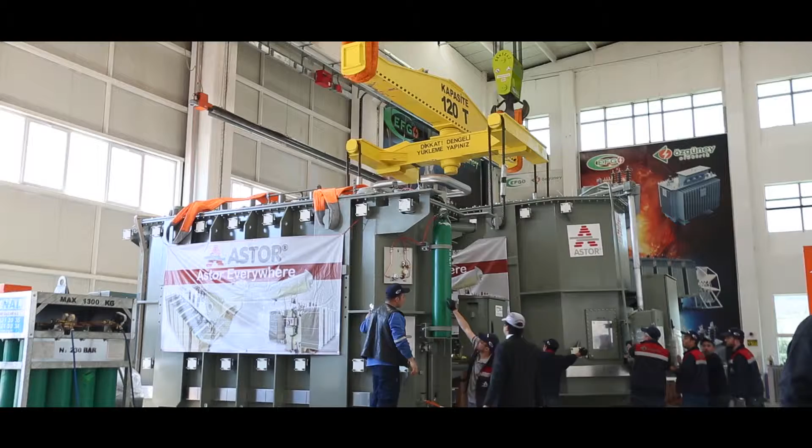The company manufactures cast resin dry-type and oil-type distribution transformers, as well as power transformers up to 220 kilovolts, 150 megavolt ampere at its factory. This facility boasts a closed area of 26,000 square meters, established on a 36,000 square meter surface at the Ankara-Sincan First Organized Industrial Zone. Our customer satisfaction-oriented company takes quality as our primary target for both manufacturing and service.

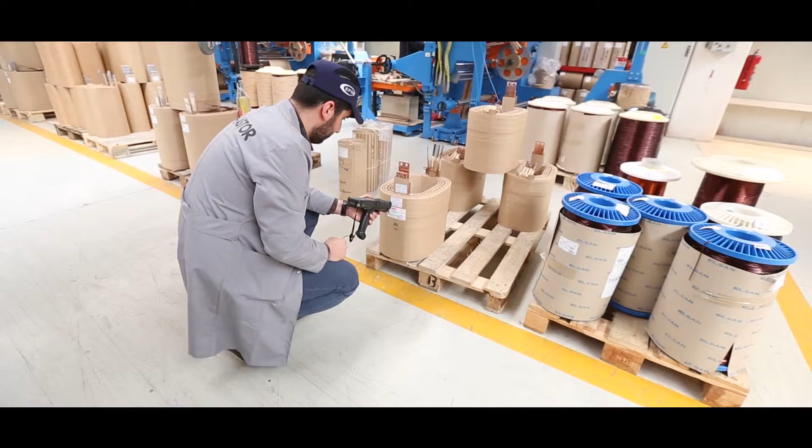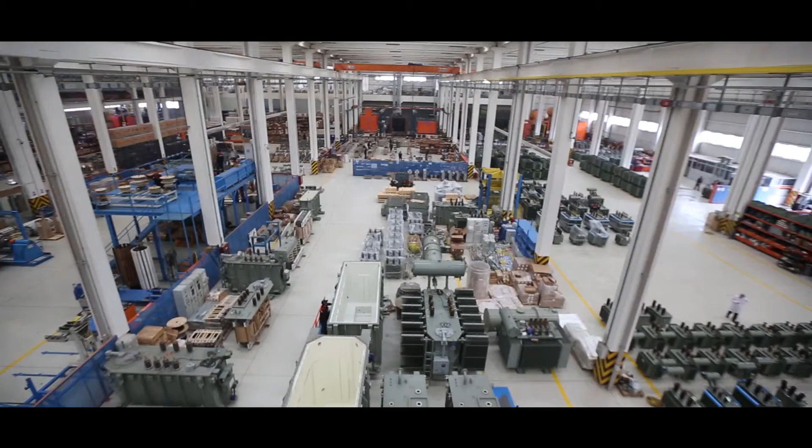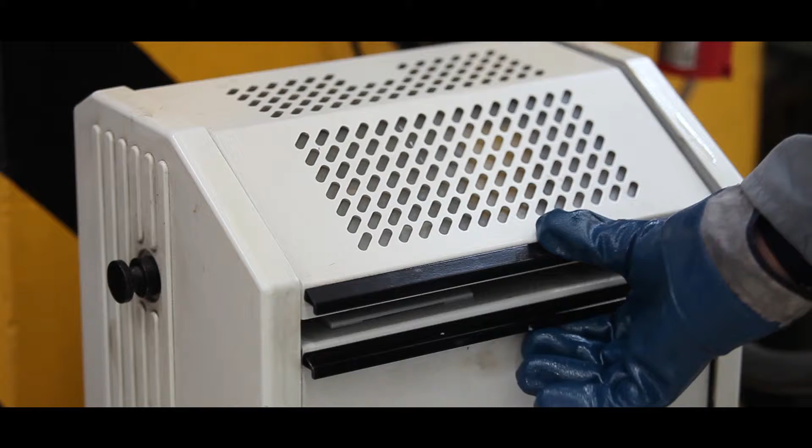All of the processes of manufacturing in accordance with the aforementioned target are meticulously checked at every turn by our experienced and competent quality control staff. Our company is in possession of many management systems such as TS EN ISO 9001, TS EN ISO 14001, TS EN ISO 17025, and OHSAS 18001. The completion of manufacturing is ensured in accordance with the related project and the quality management systems.

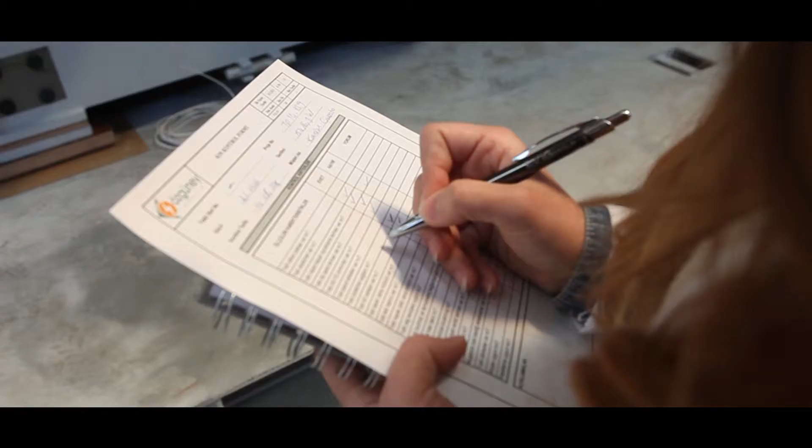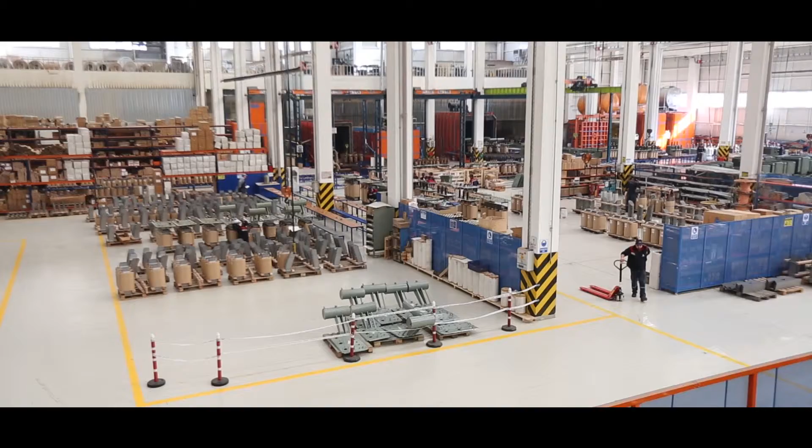Related non-conformities are eliminated with the implementation of corrective and preventative actions. All processes are recorded and tracked. Kaizen studies are conducted for the processes that require one by analyzing its accumulated data. Astor A.Ş., with a monthly production capacity of 2,000 distribution transformers, boasts Turkey's largest capacity and ranks within the top 5 companies of the world in its field.

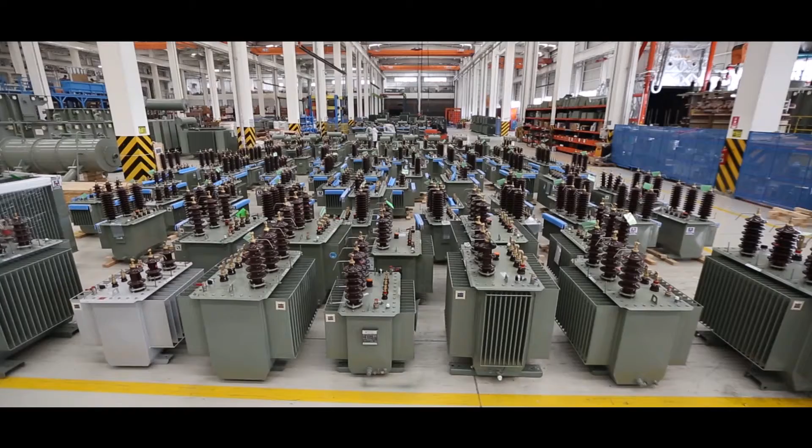At our facilities, we manufacture cost-efficient, safe, low-loss, long-lasting oil-type transformers with a power range of 250 to 2,500 kilovolt ampere and up to 36 kilovolt voltage levels, as well as custom-type transformers per customer demand, bearing the brand of Astor and EFG. Power transformers up to 220 kilovolts and 150 megavolt ampere, bearing the brand of Astor.

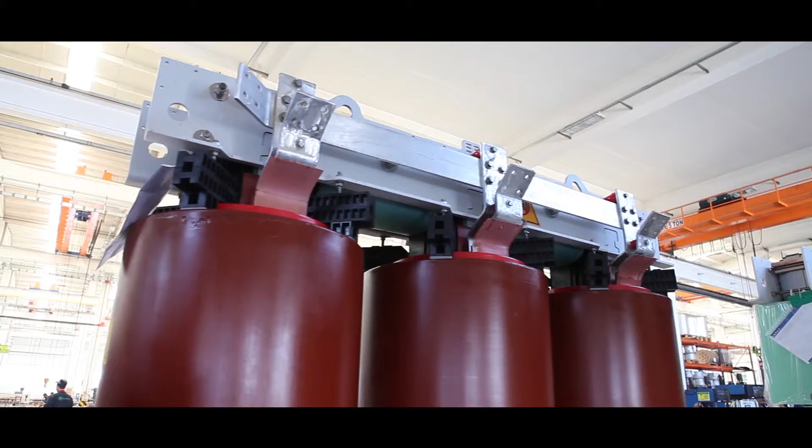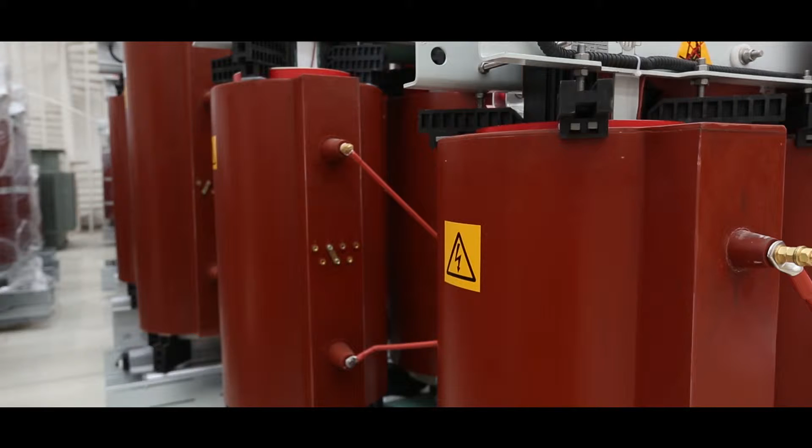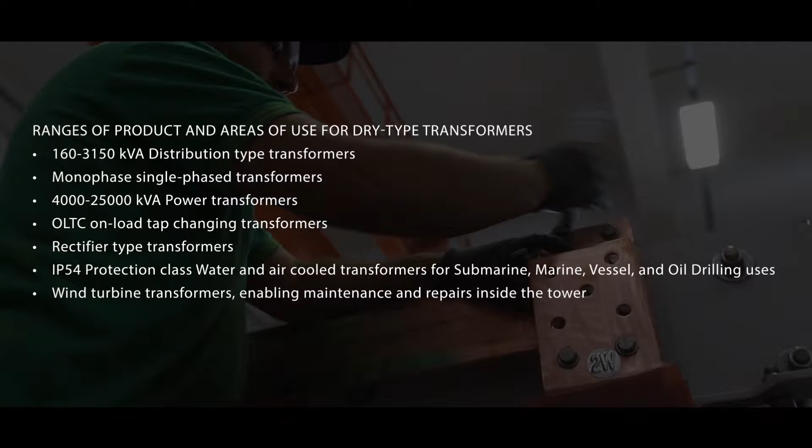Cast resin dry-type distribution transformers at the quality standard of ISO 9001 with a power range of 250 to 3,150 kilovolt ampere, up to 36 kilovolt voltage levels with natural air-cooled or fan-cooled options, bearing the brand of EFG. Ranges of product and areas of use for dry-type transformers are given below: 160 to 3,150 kilovolt ampere distribution-type transformers, monophase transformers, 4,000 to 25,000 kilovolt ampere power transformers, OLTC on-load tap-changing transformers, rectifier-type transformers, IP54 protection class,

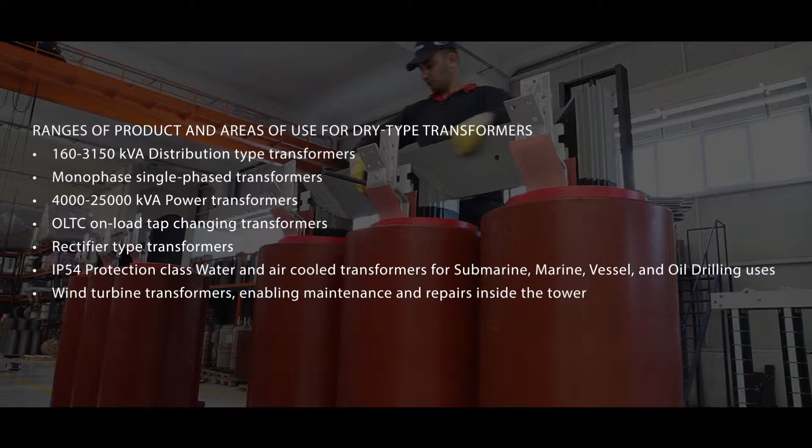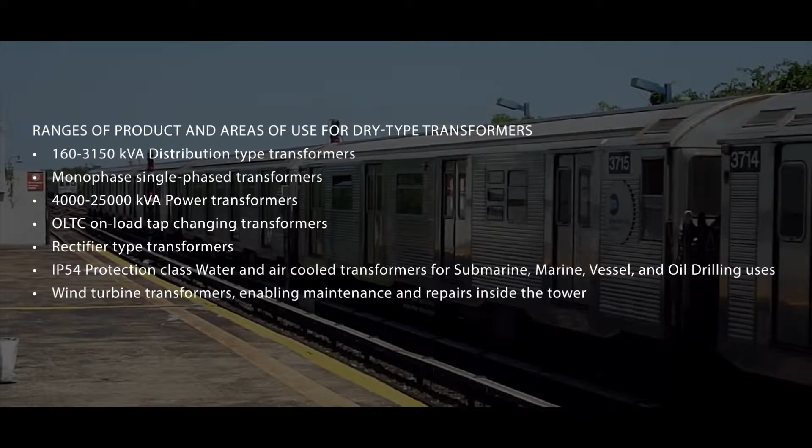water and air-cooled transformers for submarines, marine vessels and oil drilling uses, wind turbine transformers enabling maintenance and repair inside the tower. Minimizes the risk of burning and explosion at locations with a high density of human habitation, such as subways, tunnels, mines, airports, shopping malls, schools, hospitals and skyscrapers. May be manufactured with an internal or external type cell as optional in conformity with IP20, IP23, IP33 protection classes.

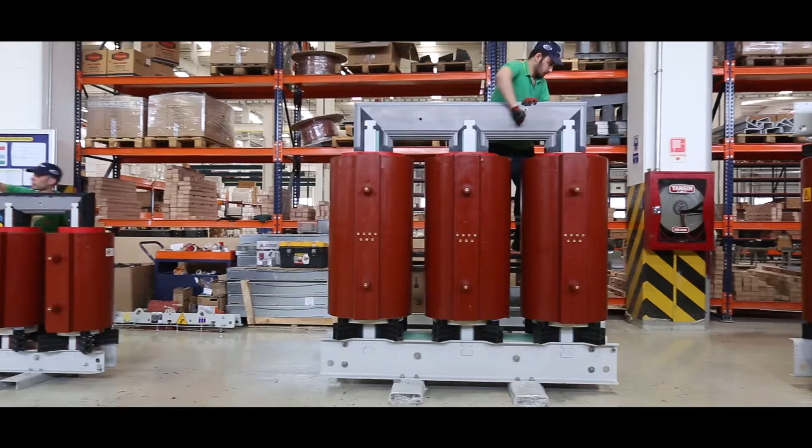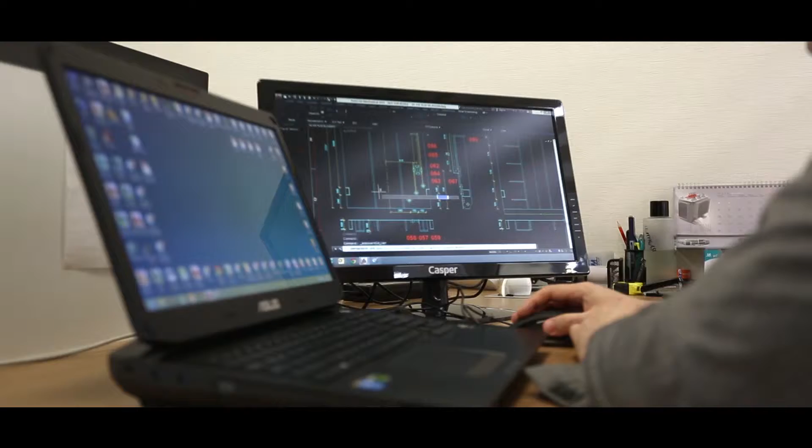Apart from the aforementioned, our overseas type test reports for the product series within the product range are constantly updated and have been certified by the international accreditation testing organizations such as KEMA, IPH and CESI. The materials obtained in their raw form are converted to semi-finished product inside our facilities and are then turned into transformers by the skilled hands of our experts. The projects are prepared by our experienced design team under the leadership of over 30 engineers.

We, as Astor Transformateur, are aware of the importance of R&D phases for our company and country. Therefore, a determined and firm step has been taken by our company to work with highly skilled personnel in order to own an up-to-date and comprehensive R&D center as of 2011.

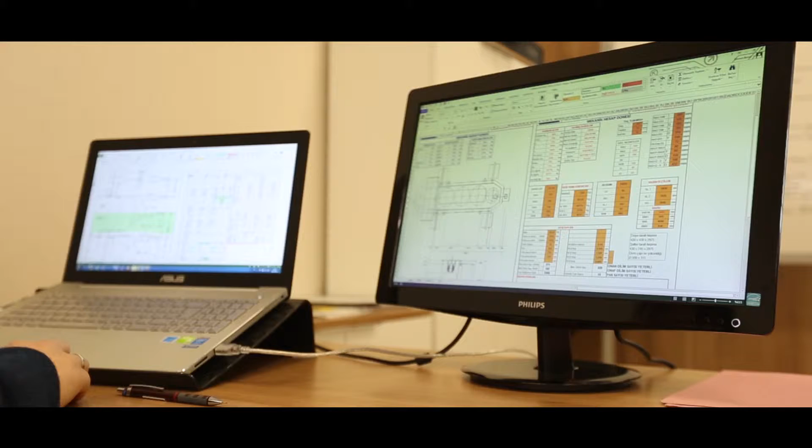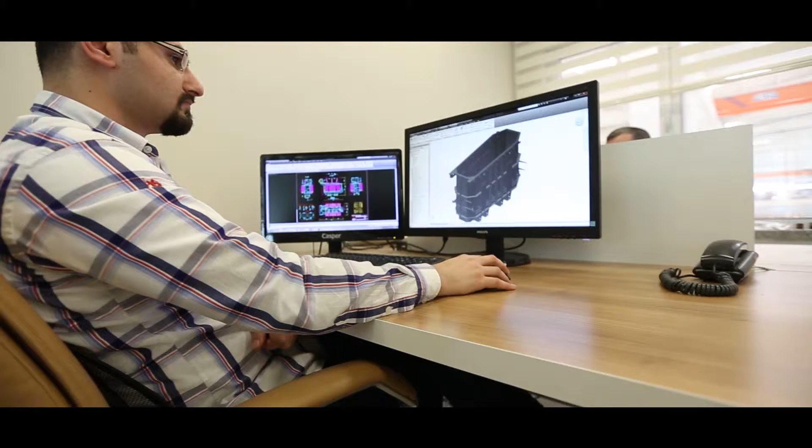The duties of the R&D center of our company, which is passionate about always keeping track of world technologies, include increasing manufacturing efficiency and providing solutions for arising problems, developing the best and innovative designs in terms of functionality, performance, dependability, cost and manufacturability, supporting the design and manufacturing process with analysis and simulations, preparing and keeping track of R&D projects, as well as providing training support for manufacturing and design personnel regarding transformers.

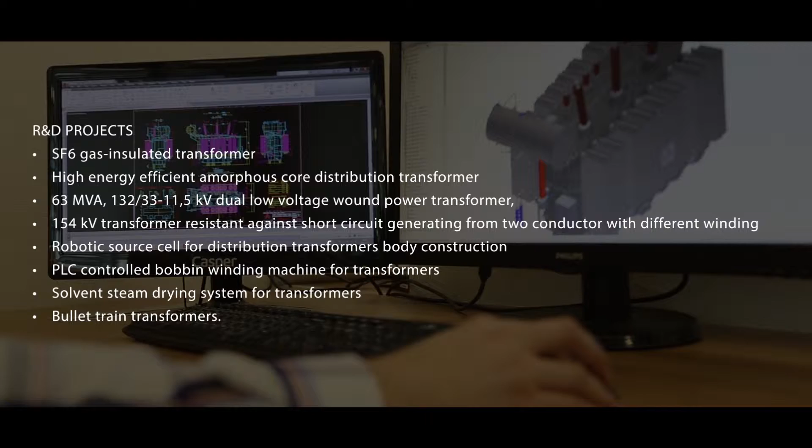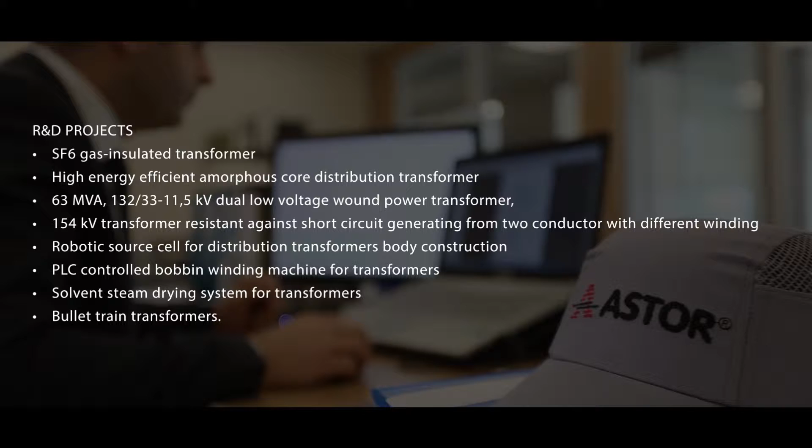Our R&D Centre has conducted and successfully completed many R&D projects in cooperation with TÜBİTAK. Some of these projects are given below. Design and prototype production of SF6 gas-insulated transformers. Design and prototype production of high-energy efficient amorphous core distribution transformers. Design and prototype production of 63 megavolt ampere, 132/33/11.5 kilovolt dual low voltage wound power transformers.

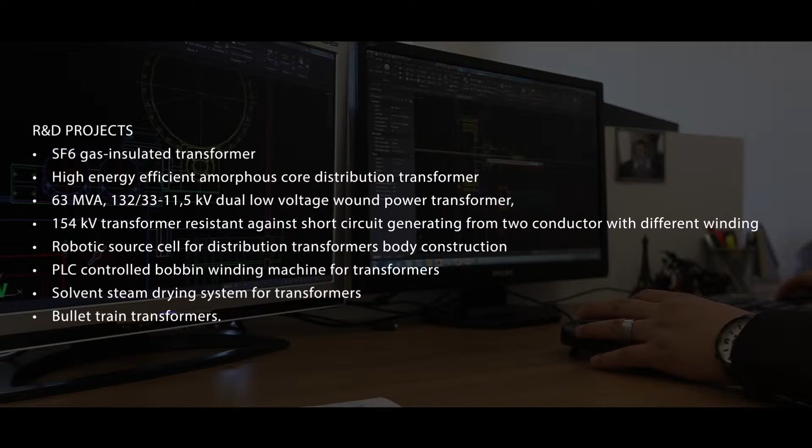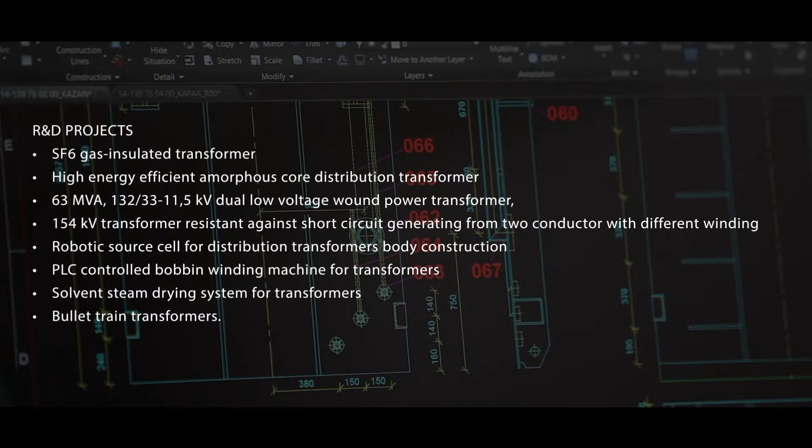Design and prototype production of 154 kilovolt transformers, resistant against short circuit generating from two conductors with different winding. Design, development and implementation of robotic welding cell for distribution transformers body construction. Design and prototype production of PLC-controlled bobbin winding machine for transformers. Development and prototype production of a solvent vapor drying system for transformers, as well as bullet train transformers.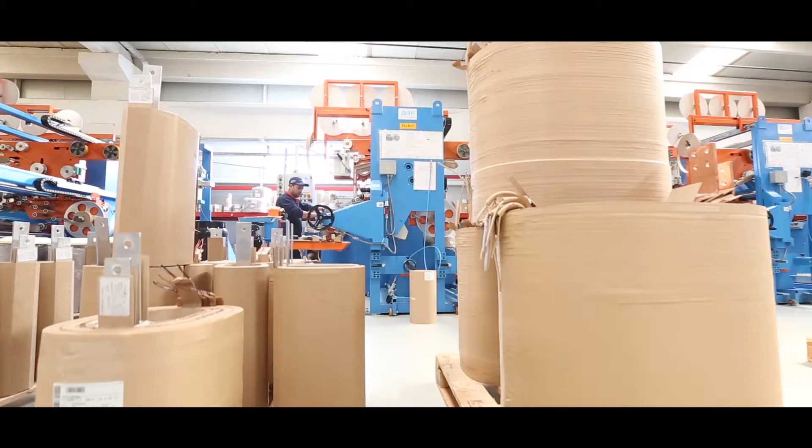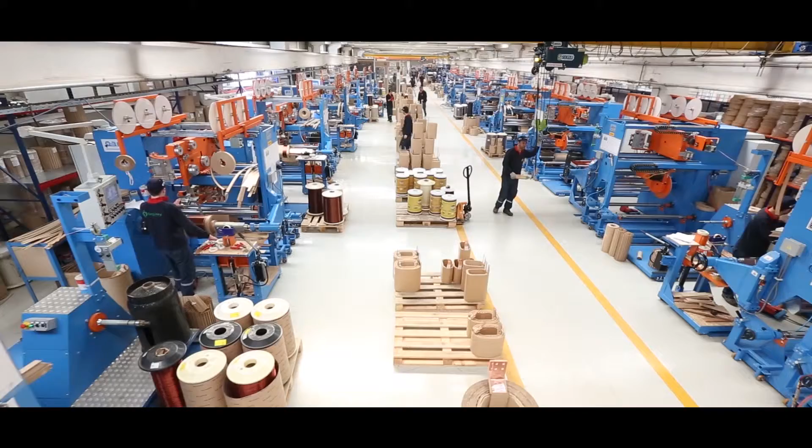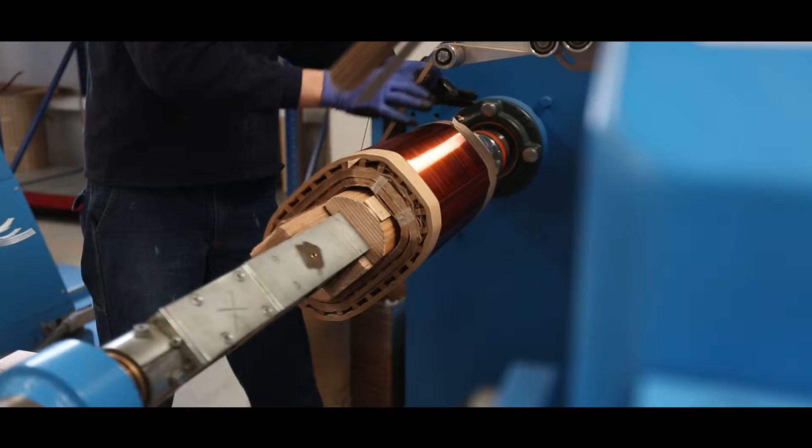Oil-type transformers. Enamel and paper-isolated round and flat electrolytic copper and aluminium conductors are utilized for conducting material in windings of distribution transformers. The used insulating material is water and voltage resistant. The normal distribution of voltage surges has been ensured and strain of windings has been prevented with the implementation of special winding implementation in high voltage windings by means of increasing the bobbin inlet-outlet layer insulations.

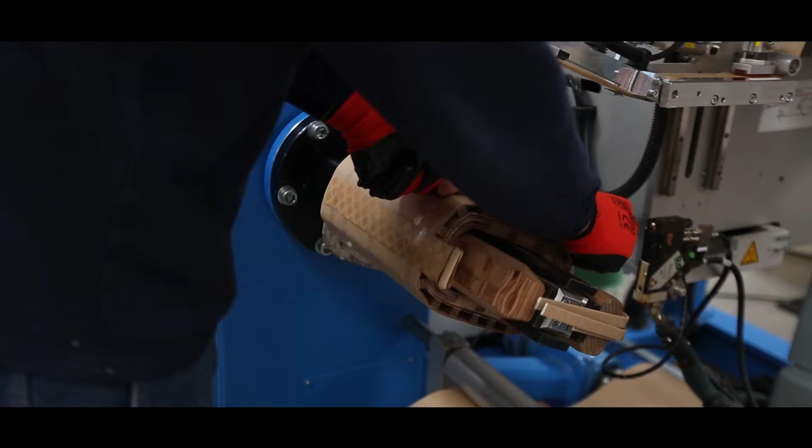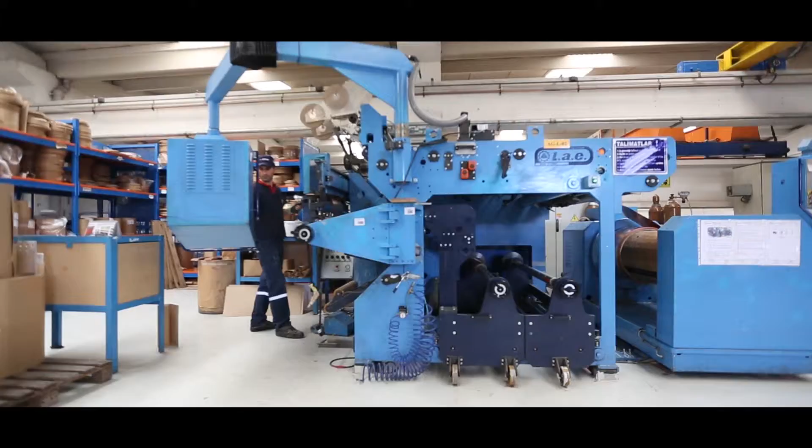The windings of power transformers are executed as overturned and layer winding depending upon design conditions. Vertical and horizontal press systematic bobbin machines are utilized for the purpose of ease of manufacture for layer windings and elimination of gaps on the contact surfaces of windings. Winding processes are carried out by CNC-controlled automatic machines.

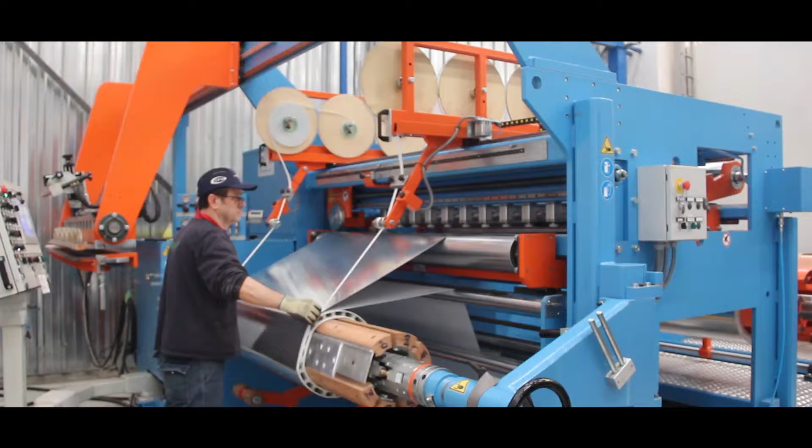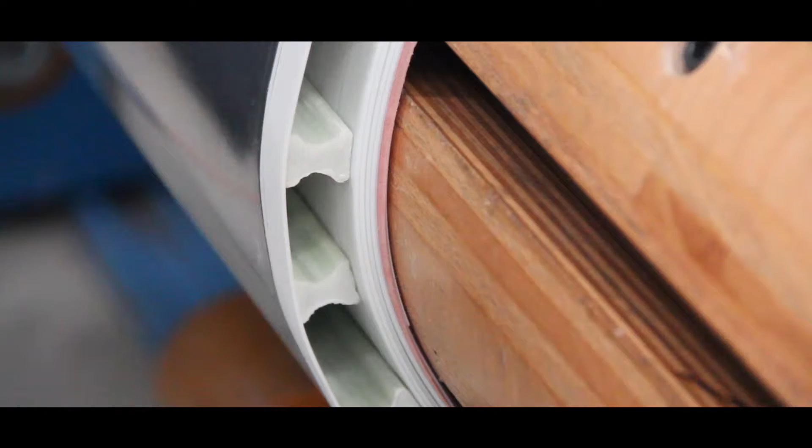Dry-type transformers. Tape winding technology, copper or aluminium tapes, are utilized for low-voltage windings depending upon the project design due to their technical advantages. Radial short-circuit forces are controlled through the utilization of special pre-resin impregnated material according to the desired isolation class between spurs.

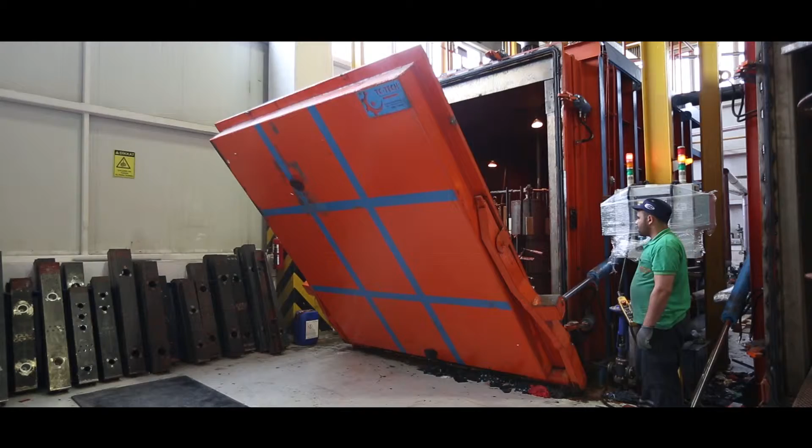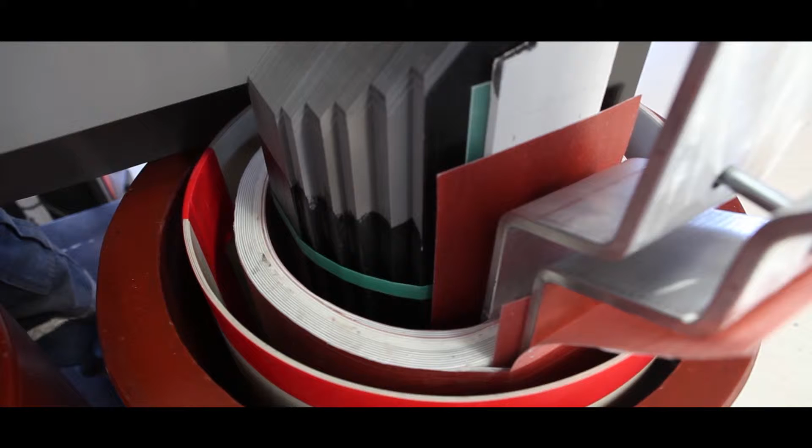Bobbins are provided resistance against difficult conditions and excellent dielectric features by being subjected to a hardening process following the winding process. High voltage bobbins are manufactured using copper and aluminium flat or round conductors with F or H class isolation depending on the project. Fine natural cooling is ensured within our designs by means of effective dispersed cooling channels. Also, advantage is provided against high voltage surges.

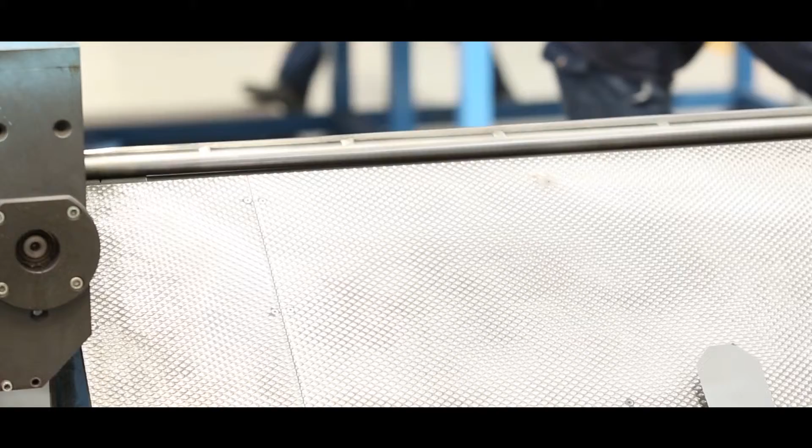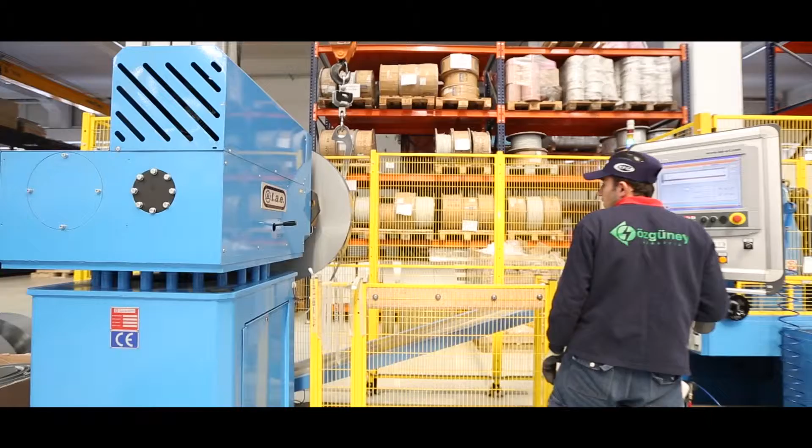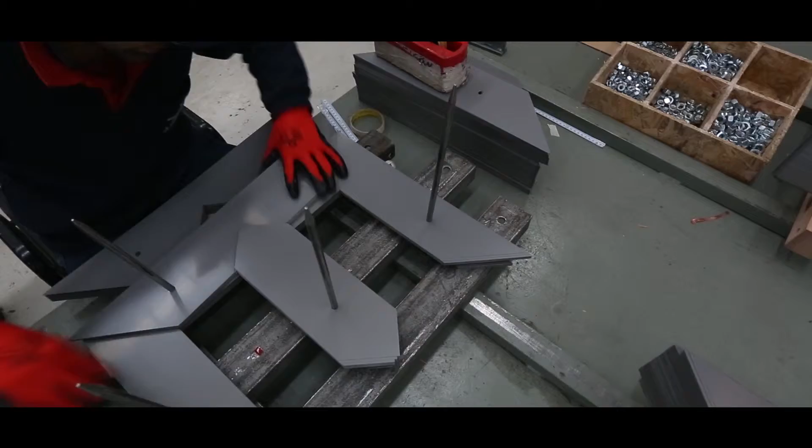The core is manufactured from M5, M4 silicon alloy sheets with oriented crystals and a thickness of 0.30, 0.27 and 0.23 millimeters, with 45 degrees slanted cut at the transition regions of the magnetic circuit. The production of the core is performed according to the project by cutting all of the sheets utilized within the magnetic circuit with CNC-controlled cutting machines. The cutting and alignment of the magnetic circuit is performed with a method called step lap, which is useful for minimizing the iron loss. The nucleus is aligned with cross and longitudinal step lap implementation.

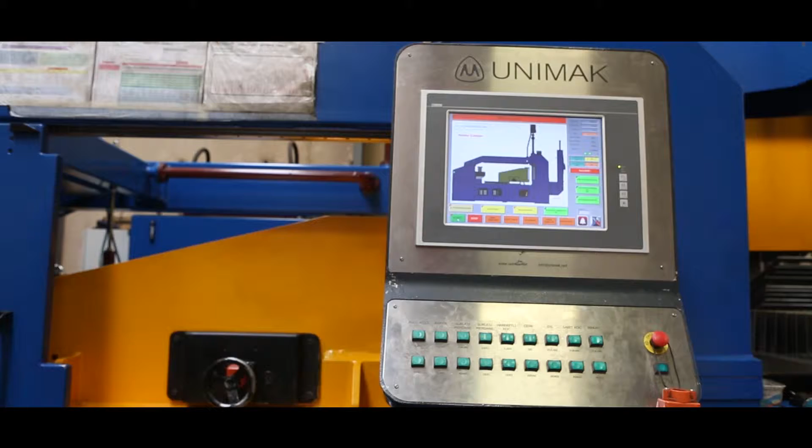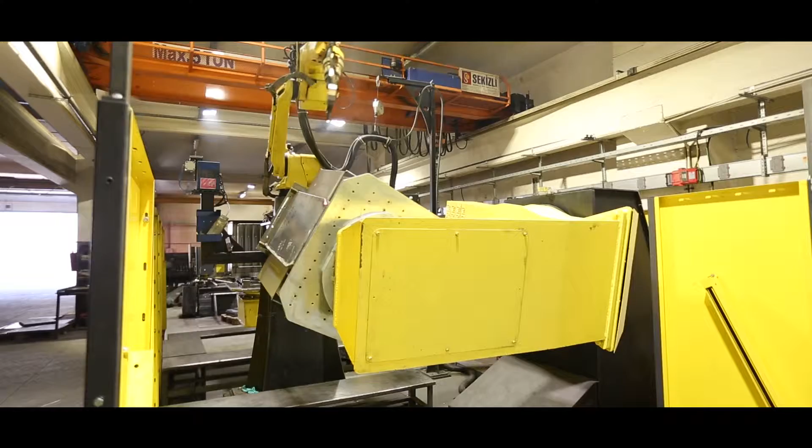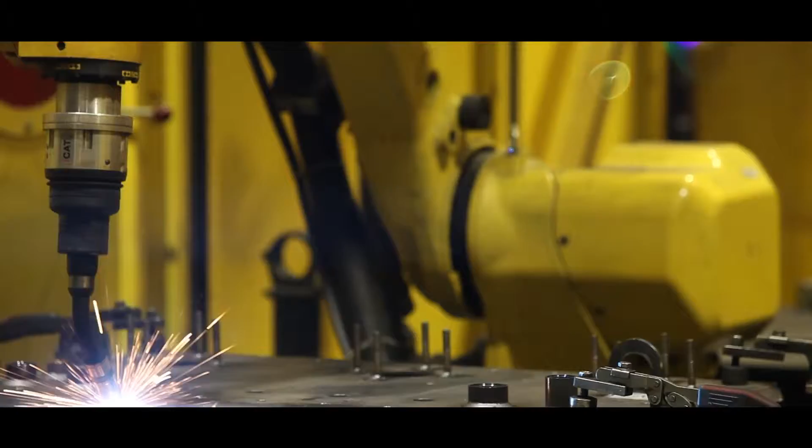CNC-controlled plasma and wave wall machines are utilized for the production of the boiler. The welding operations of boilers are performed with CNC-controlled robots. CNC-controlled plasma machines are utilized for the production and cutting operations of transformer caps, and welding operations of the caps are performed with CNC-controlled robots. We are able to manufacture products with standard quality by minimizing human error through the use of CNC-controlled robots.

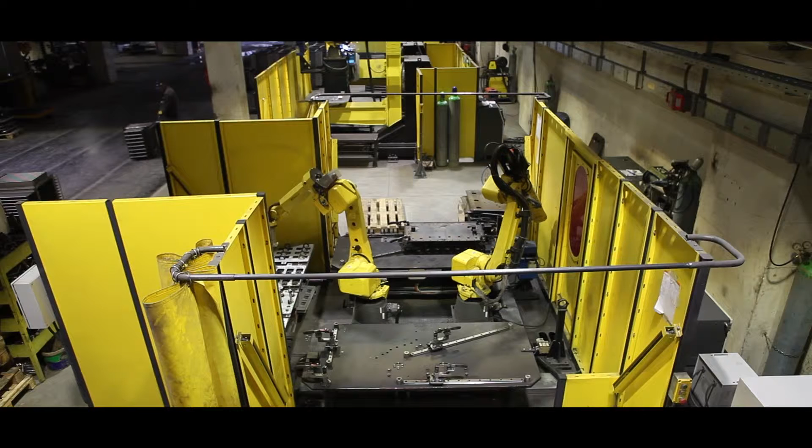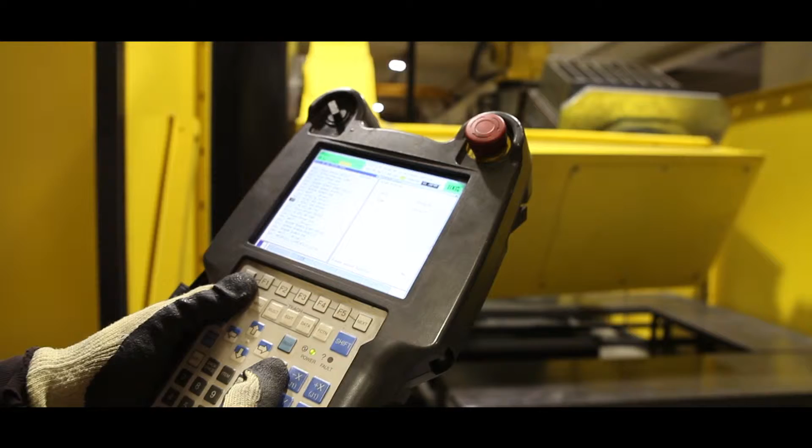Boilers whose mounting and welding operations are completed are put through a tightness test under compression. The suction resistance of wave-walled boilers is designed as 0.65 bar and of radiator boilers as 1 bar. The manufactured boilers are subjected to sandblasting operations if requested by the customer. The dyeing process is completed in accordance with the related standards. The boiler cap is designed for the extraction of winding ends.

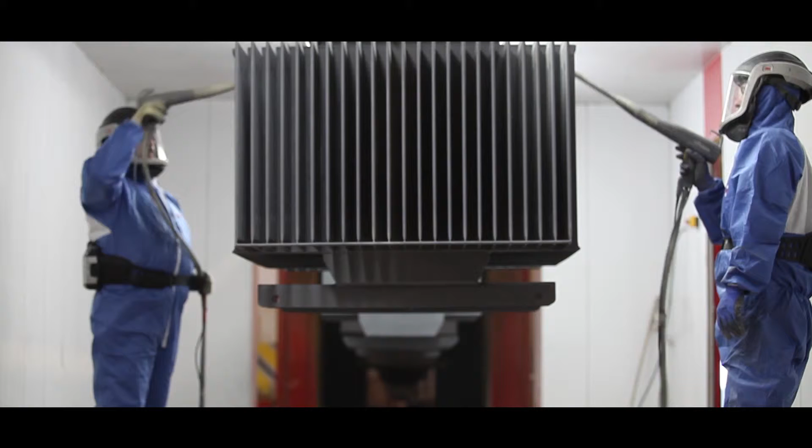The parts are sandblasted following the leak checks, and the tank is prepared for the dyeing process by means of chemical showers. These are prepared for use by first lining with an automatic conveyor system and afterwards top layer electrostatic powder coating. The products with the highest quality, completely homogeneous and desired dye thickness are meticulously put through quality control.

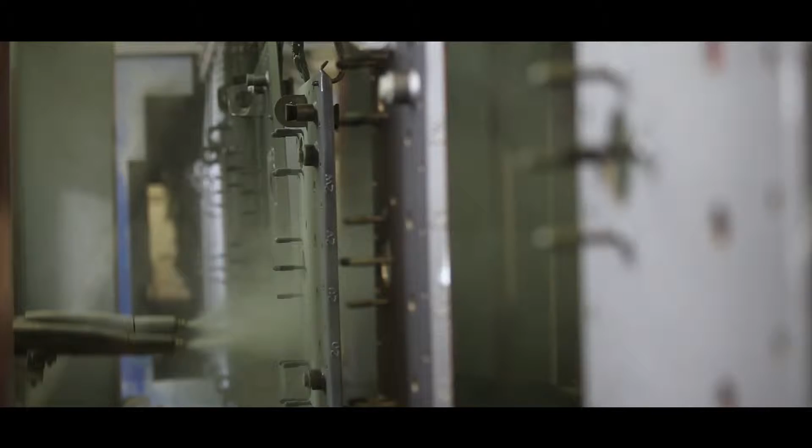Primarily, the bobbins are carefully placed on the nuclei in order to form the mobile part, and afterwards the laths are mounted to compress the core and nucleus for the purpose of stabilization and conveyance of radial forces. Then the upper nucleus is aligned and yokes are tightened. Thus, the possibility of movement of the transformer on the road is eliminated by increasing the pressure surfaces.

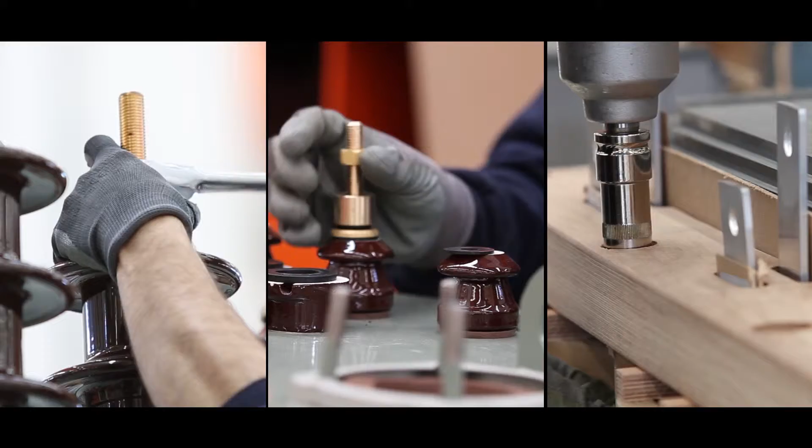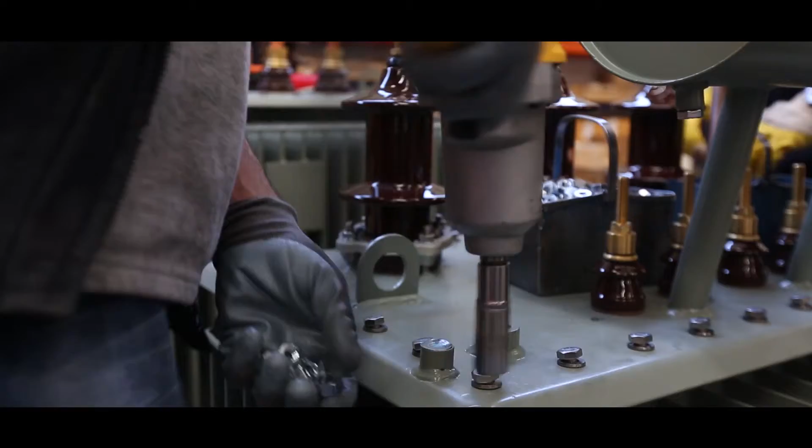The cap is mounted on the mobile part, and the connections of commutator and gauge ends are made with silver electrodes. Later on, AG and YG isolator mounting on the cap is completed with special gaskets, paying maximum attention to oil leakage. With this process, the mobile part is prepared for firing.

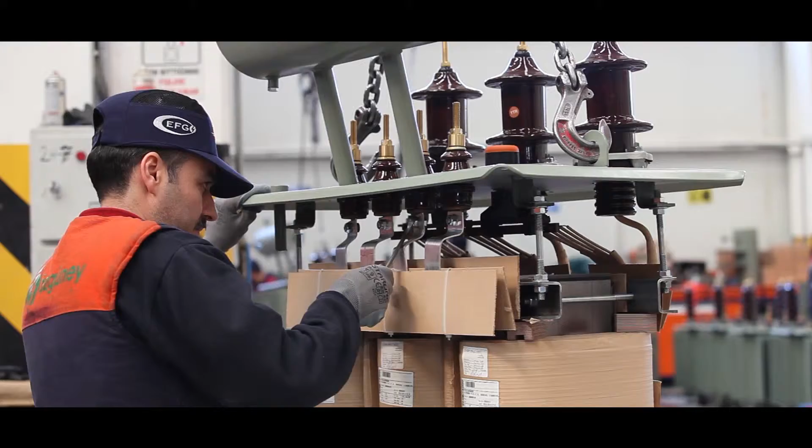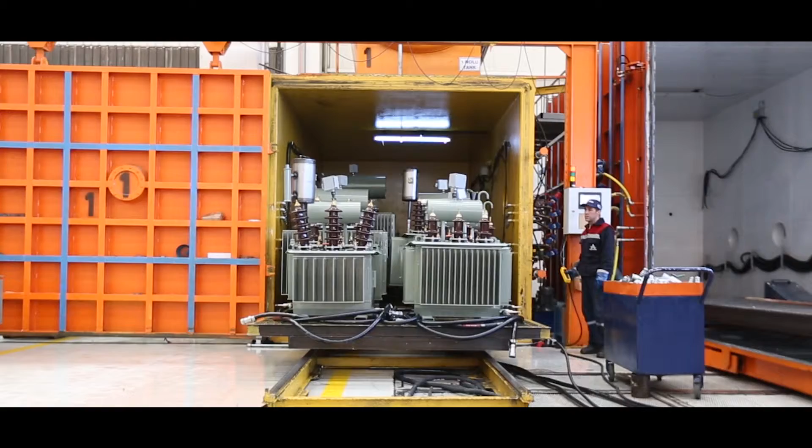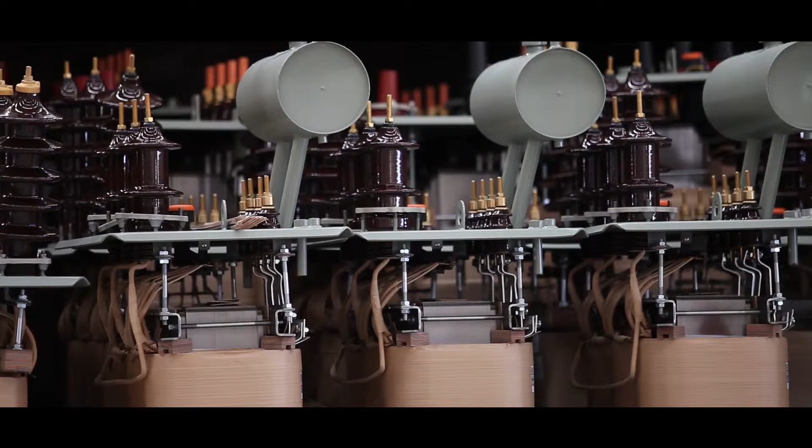Heating and suction is applied with our drying ovens at the determined temperature in order to dehumidify the solid insulating materials of the mobile part. Thus, the maximum drying process is performed. The humidity and temperature values in our ovens are constantly analyzed and evaluated via the charts on the digital screens. After removing the mobile part from our drying ovens, it is placed within the boiler at the temperature of 20 degrees Celsius within 15 minutes at most.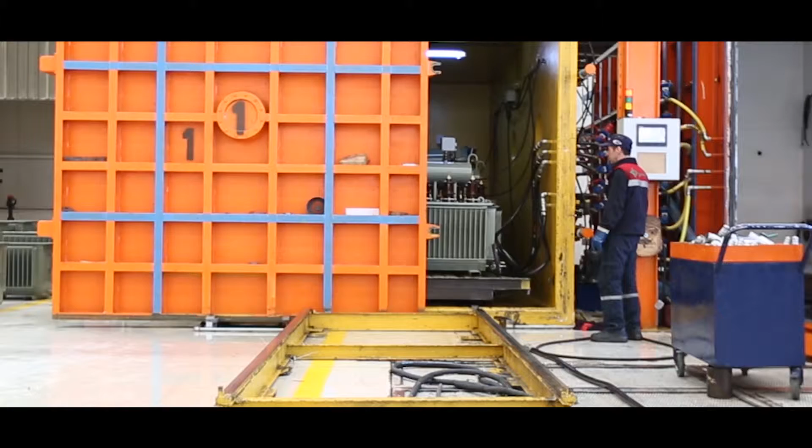Oil filling is performed in a suction environment at predetermined temperatures within the oil-filled suction ovens. Finally, the mounting process is completed by attaching accessories such as the indicator valve, throttle, thermometer, etc. on the oil-filled transformer and submitting it to the testing division.

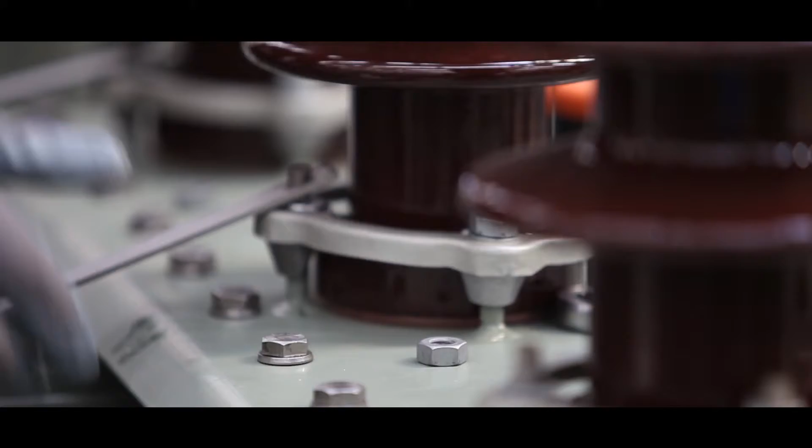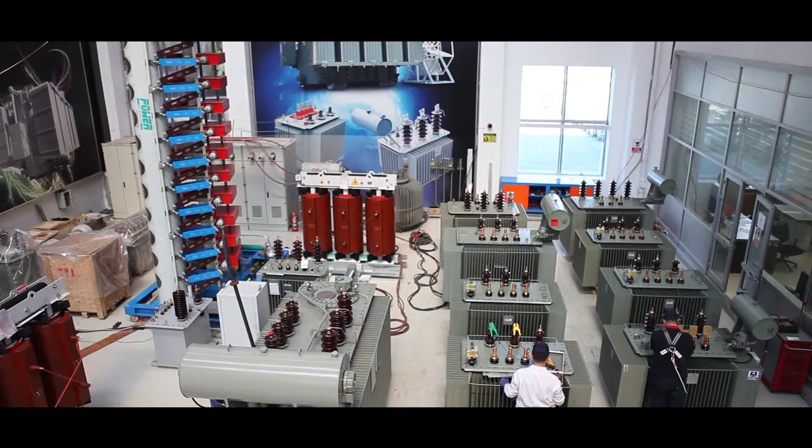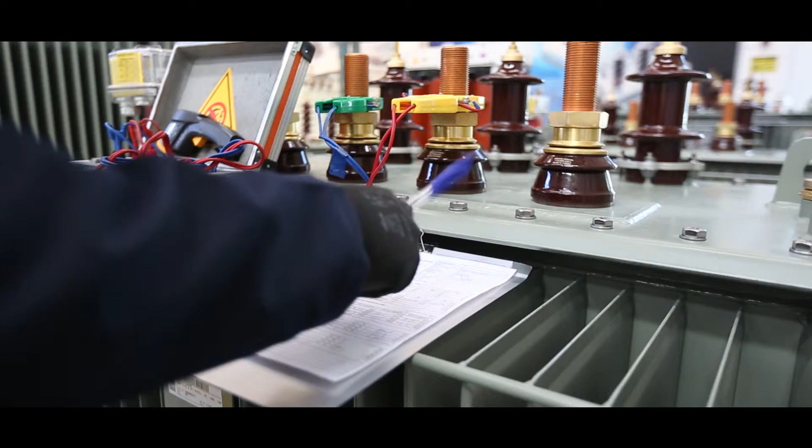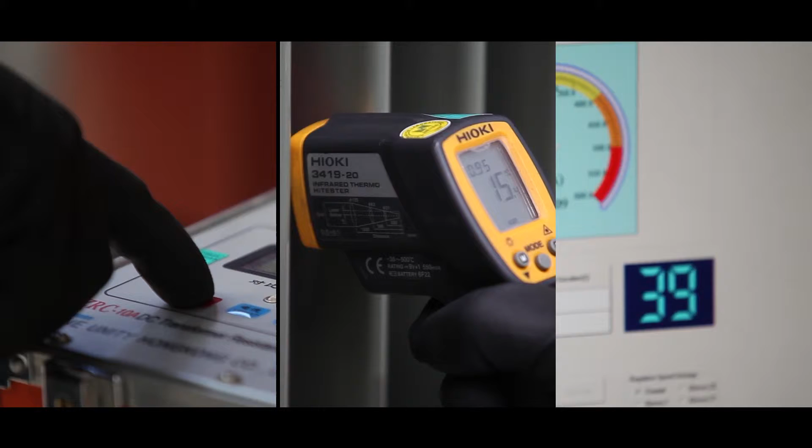Each of our manufactured transformers is subjected to routine tests at IEC 60076 TS267 standards at our laboratories, which have been accredited with AB 0650T accreditation number on 12/06/2013 by the Turkish Accreditation Agency within our facilities. All the tests demanded by the International Electrotechnical Commission and Turkish Standards Institute, except mechanical resistance against short circuits, for oil-type distribution transformers, dry-type distribution transformers and power transformers, are performed at our test laboratories.

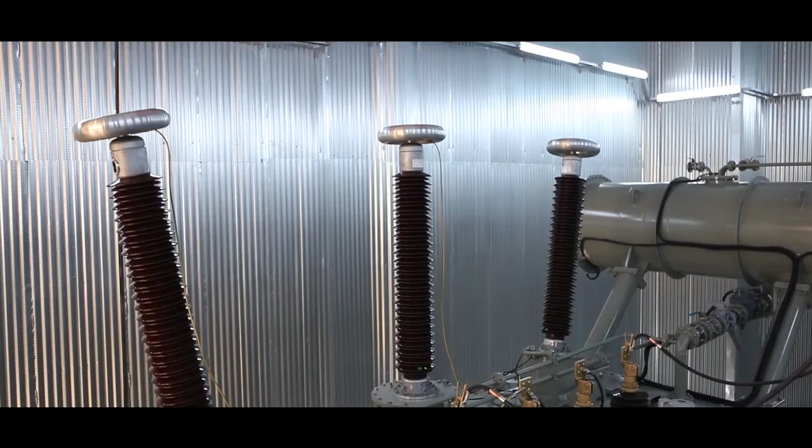Our systems comprise the testing field of transformers with 150 megavolt ampere power and highest operation voltage up to 220 kilovolts, and transformers with 30 megavolt ampere, highest operation voltage up to 36 kilovolts. Transformer routine tests. The following tests are routinely applied to every transformer manufactured at our facilities.

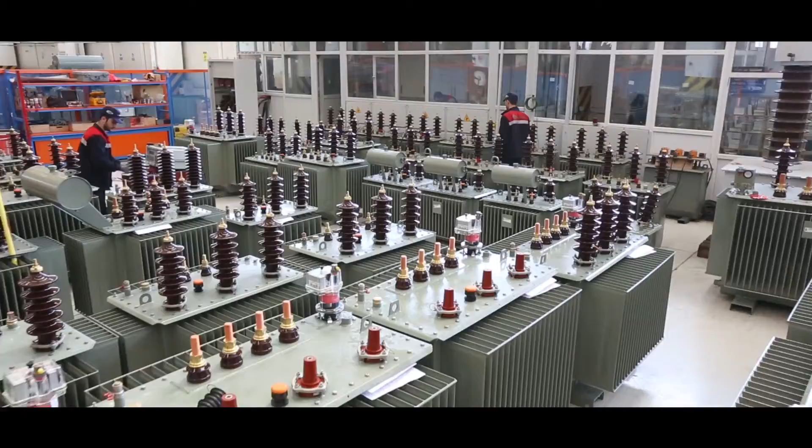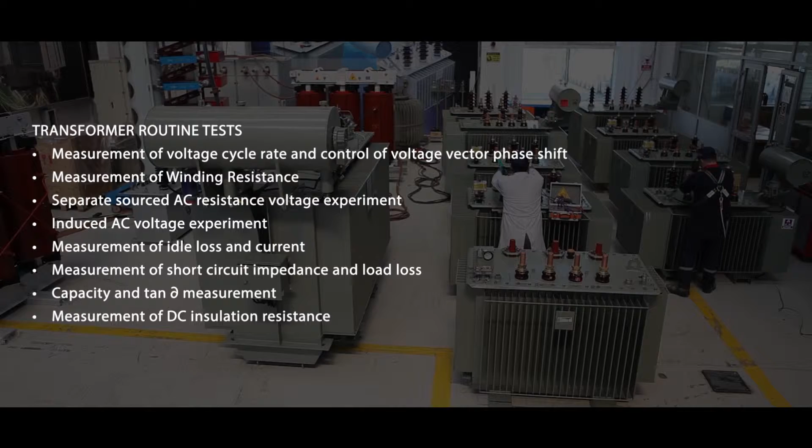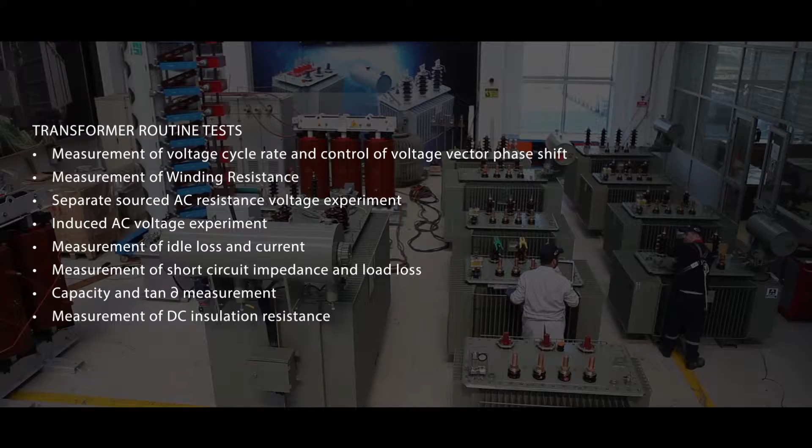Measurement of voltage cycle rate and control of voltage vector phase shift. Measurement of winding resistance. Separate sourced AC resistance voltage experiment. Induced AC voltage experiment. Measurement of idle loss and current. Measurement of short circuit impedance and load loss. Capacity and tan delta measurement. Measurement of DC insulation resistance.

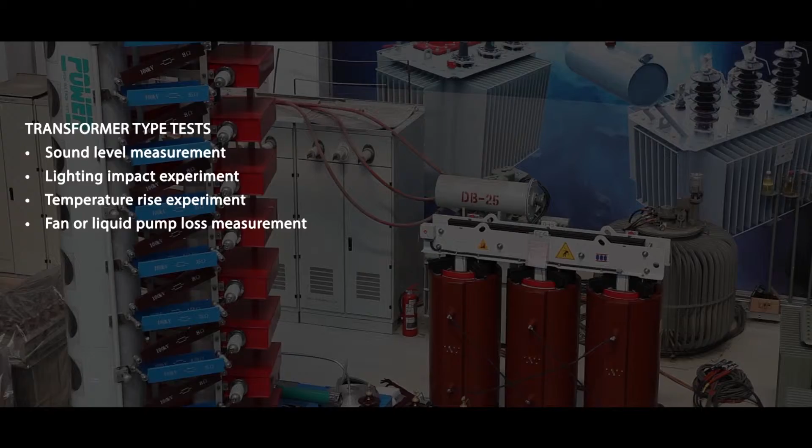Transformer type tests. The following tests are also applied to the same type transformers if requested by our customers. Sound level measurement, lightning impulse experiment, temperature rise experiment, fan or liquid pump loss measurement if a fan cooling or liquid pump system exists.

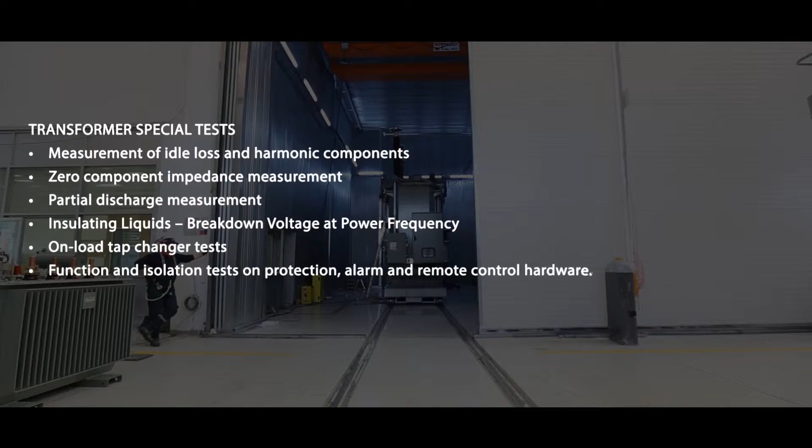Transformer special tests. Apart from the services mentioned, the following tasks can also be performed if requested by our customers. Measurement of idle loss and harmonic components. Zero component impedance measurement. Partial discharge measurement. Insulating liquids: breakdown voltage at power frequency. On-load tap changer tests. Function and isolation tests on protection, alarm, and remote control hardware.

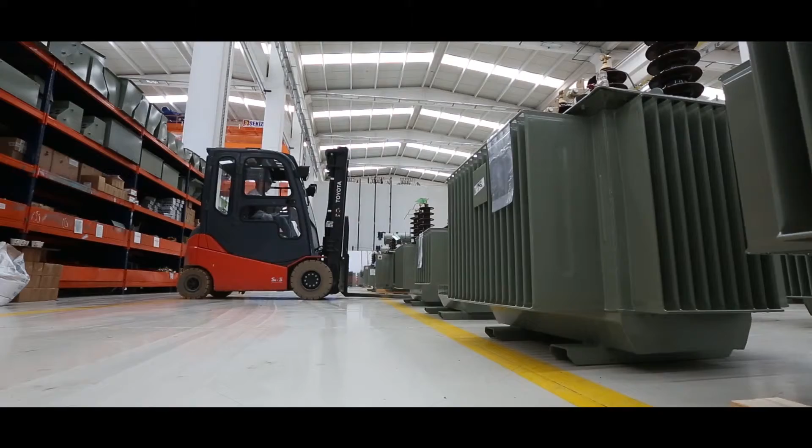The transformers, once all manufacturing and test processes have been completed, are taken to the final mounting division. After the successful completion of the final controls, they are labeled and subjected to the packaging process, ready to be shipped.

Our customer service department meticulously examines customer feedback, prioritizing customer satisfaction. The planning of our customer service unit is completed to ensure 24/7 service availability. Our company, providing service to the electrical infrastructure of over 50 countries by virtue of our product and service quality, rightfully takes pride in the awards received for exportation.